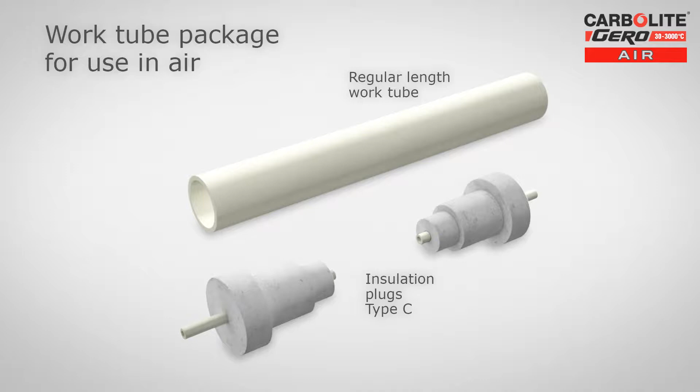Let's start with the simplest, air. To work within air atmosphere, a regular length work tube and Type C insulation plugs are required. These are installed in the tube furnace as shown here. The purpose of the end plugs is to prevent heat losses from the ends of the work tube.

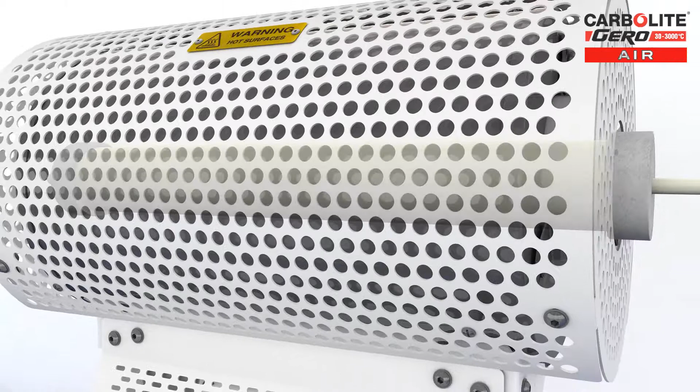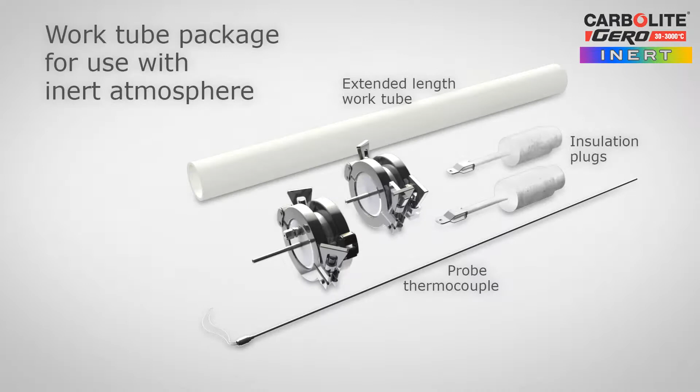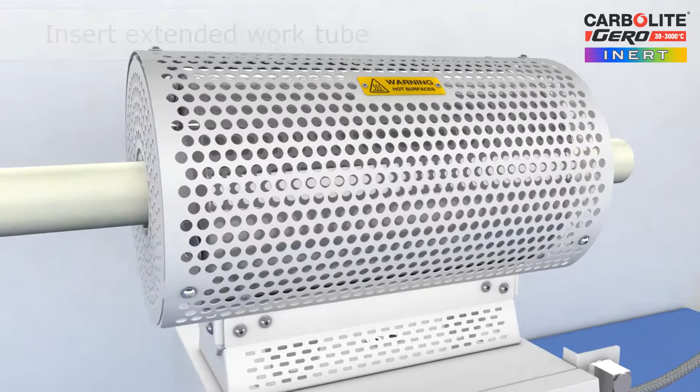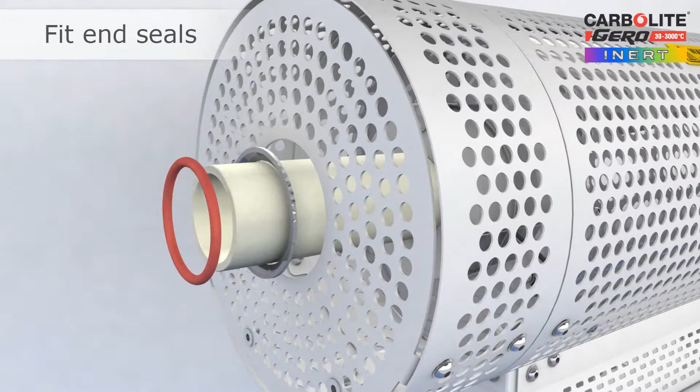For use in inert atmospheres, Carbolite Gero offers a work tube package consisting of an extended work tube, a pair of end seals, a pair of insulation plugs, and a probe thermocouple. Extended work tubes require an additional tube support assembly, which is easily fitted. The first parts of the end seals are attached to the work tube and can permanently remain in place.

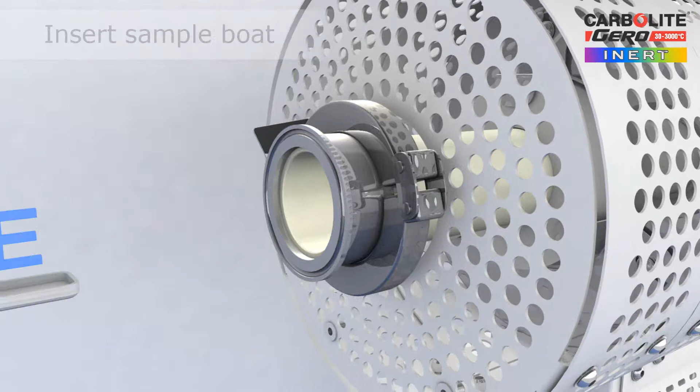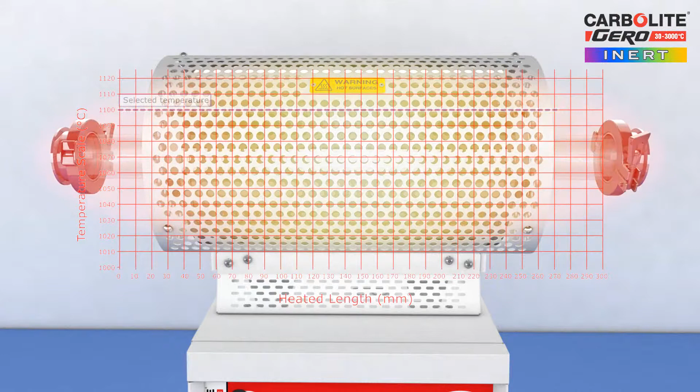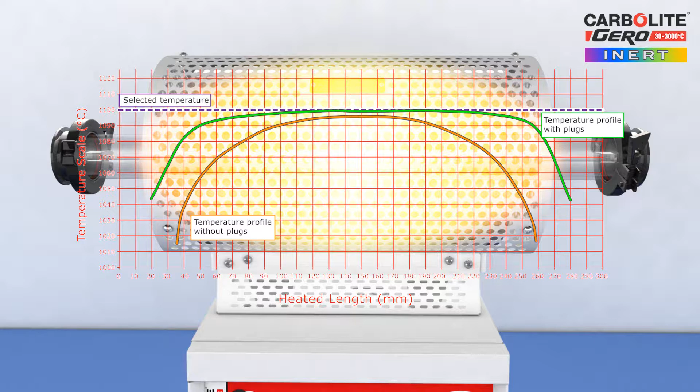The sample to be heat treated is inserted into the work tube, followed by the insulation plugs. The end plugs consist of thermally efficient insulation materials and are required for 3 reasons. 1. To prevent heat loss. 2. To improve the temperature uniformity inside the work tube. And 3. To protect the end seals from very high temperatures inside the work tube.

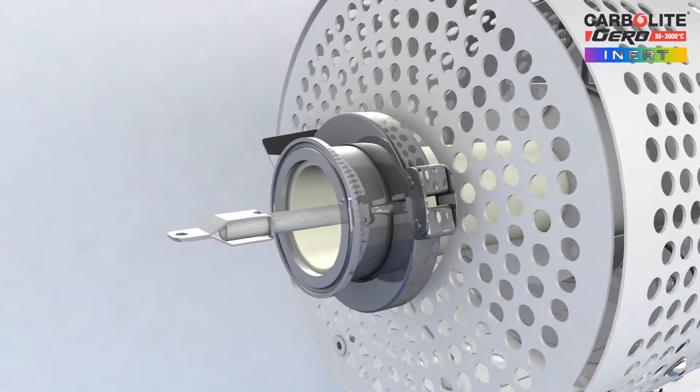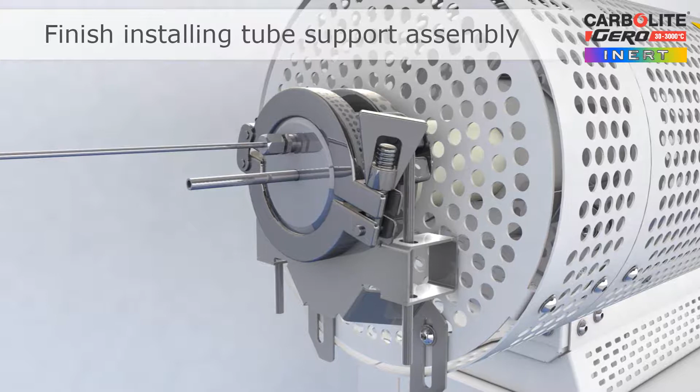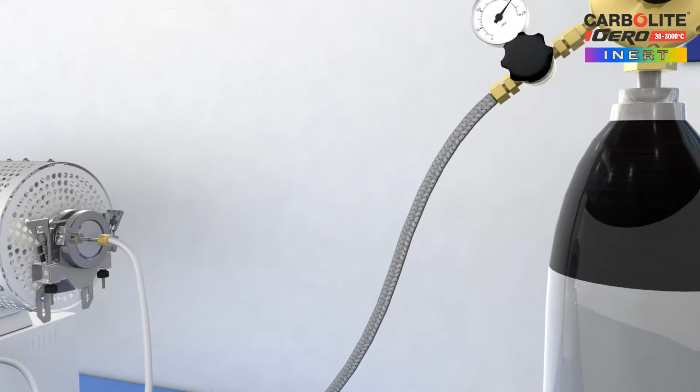The end seal plate is fitted and clamped in place to provide a gas-tight assembly. The remainder of the work tube support assembly is fitted. The gas supply can now be connected. The maximum pressure for the gas supply must be regulated to 200 millibars, and a flow meter is used to set the gas flow rate.

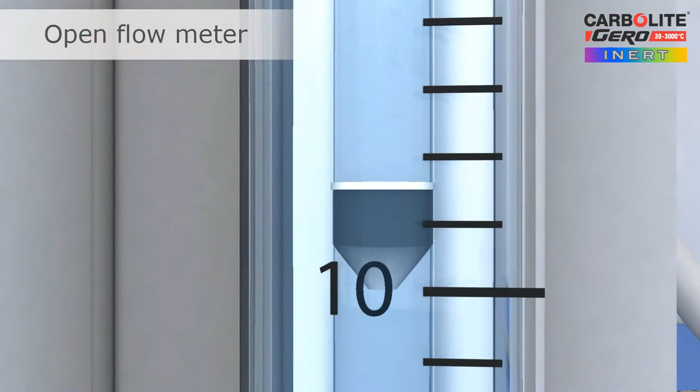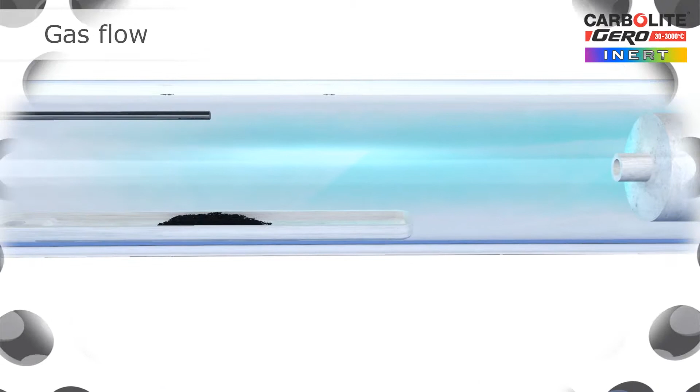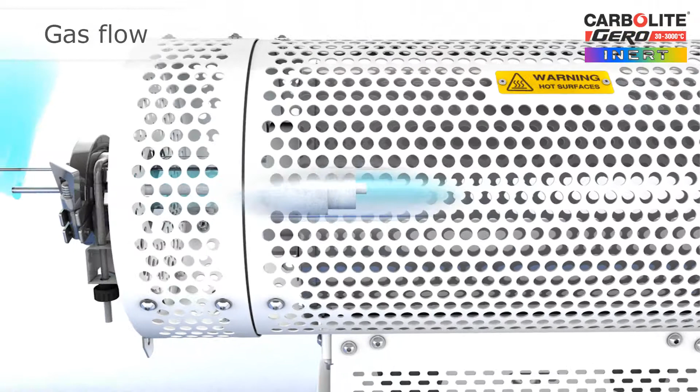The inert gas enters the work tube and displaces the air, and in particular the unwanted oxygen. This purging sequence should take place below the reaction temperature. A combination of flow rate and purge time reduces the oxygen levels to extremely low values, such as 10 parts per million. Depending on the gas being used, a fume extraction hood installed above the furnace may be required, or the outlet could be connected to a pipe to take the exhaust gases to a safe location.

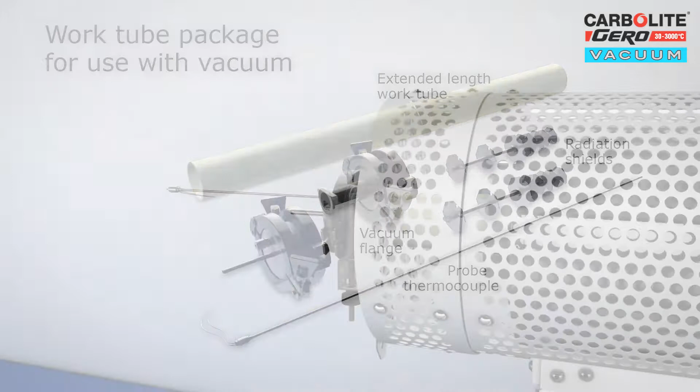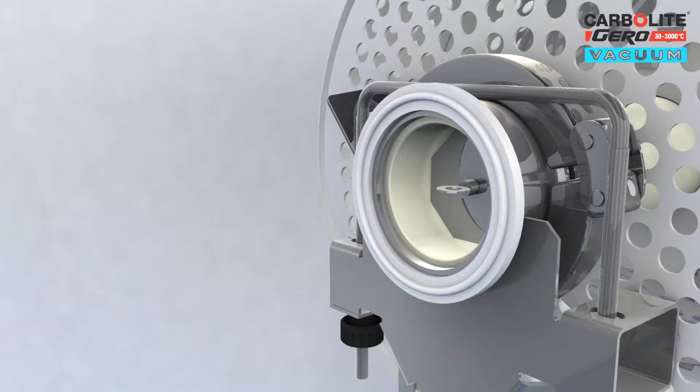For tube furnaces working with vacuum pressure, Carbolite Gero offers a work tube package including radiation shields and end seals with an NW or KF vacuum flange to which a vacuum pump can be attached. In this case, radiation shields are used to maintain temperature uniformity and reduce the heat losses instead of insulation end plugs, which would contain trapped air in the porous insulation materials.

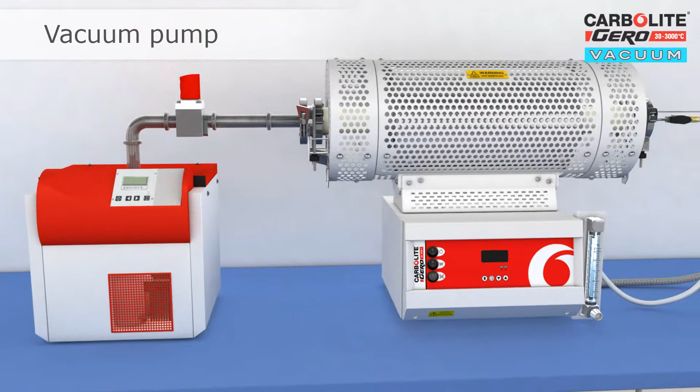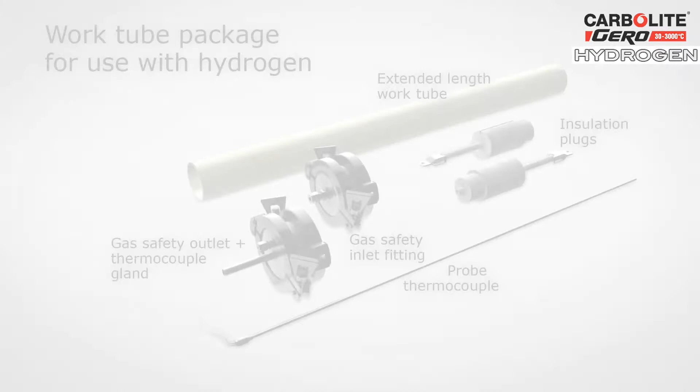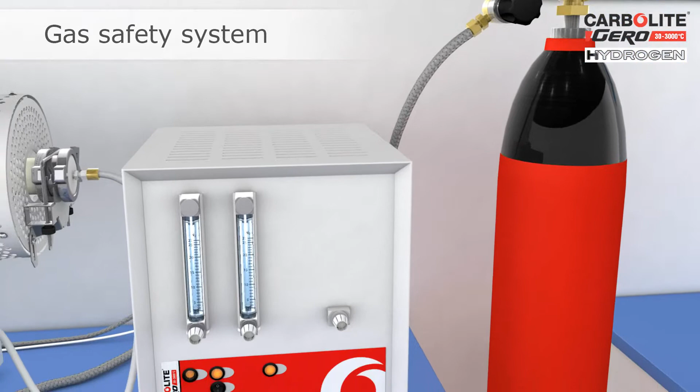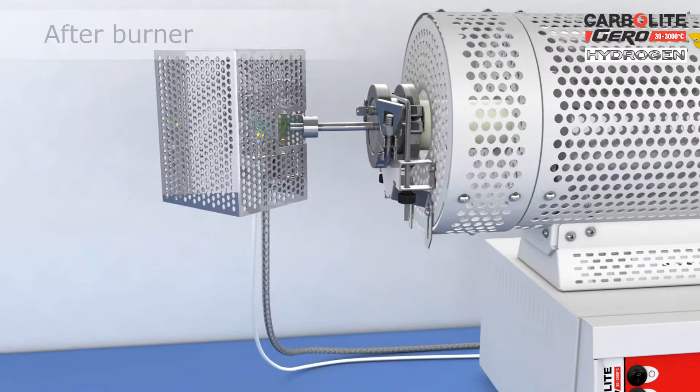For applications involving hydrogen, Carbolite Gero offers an additional gas safety system which can be attached to the tube furnace to safely control the gas flow. The gas safety system ensures nitrogen purge and only allows the hydrogen to flow when the furnace temperature is above its auto-ignition temperature. An afterburner ensures that unburned hydrogen is combusted as it exits the work tube assembly.

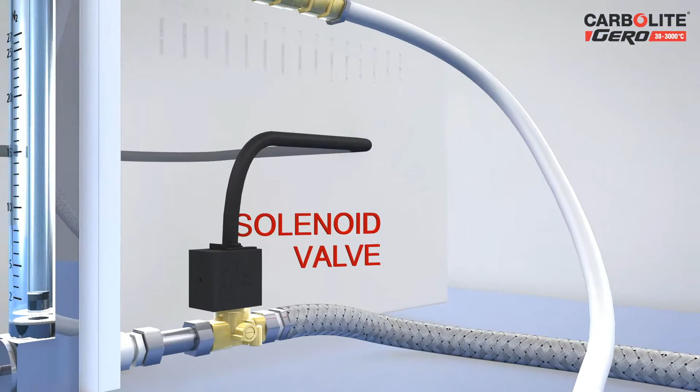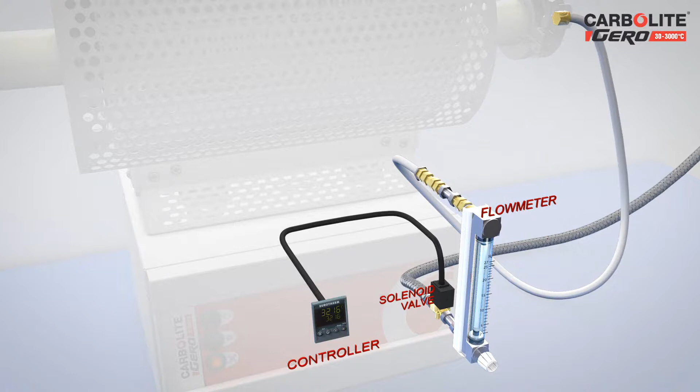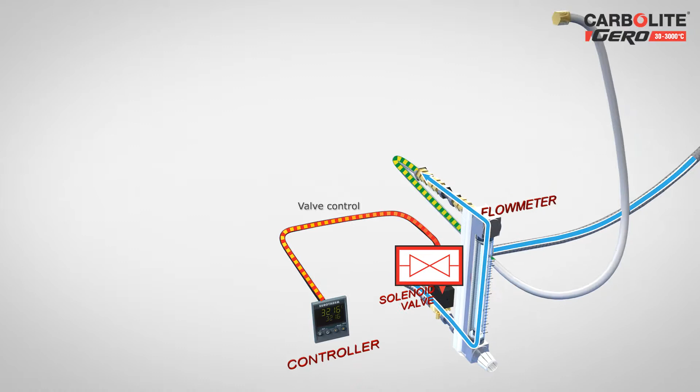In addition to work tube packages, Carbolite Gero offers further components to optimize the use of the furnace. Together with suitable temperature controllers, solenoid valves that control the flow of gas can be fitted. The valves can open or close the gas flow at preset temperatures. In this example, the gas is allowed to flow above a defined temperature. The temperature controller activates the solenoid valve above the defined temperature and closes it below the defined temperature.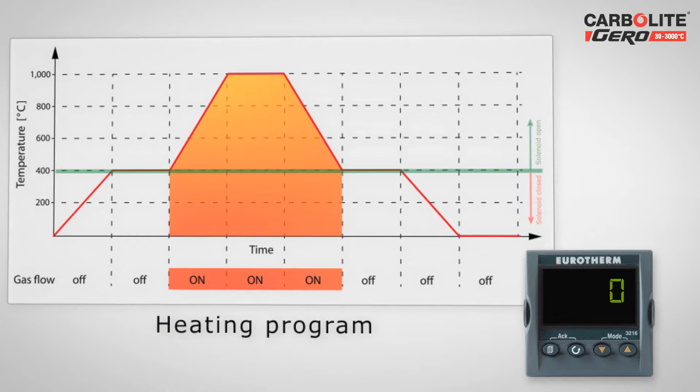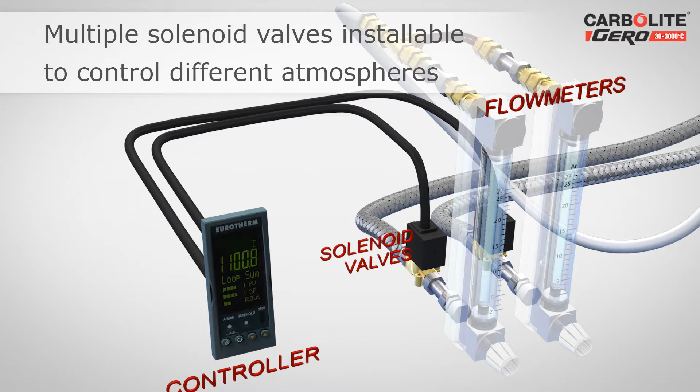It is also possible to fit several solenoid valves and flow meters to regulate the flow of several gases. This makes it possible to realize complex atmosphere process control. In this example, two gases are switched on and off during defined segments of a temperature program.

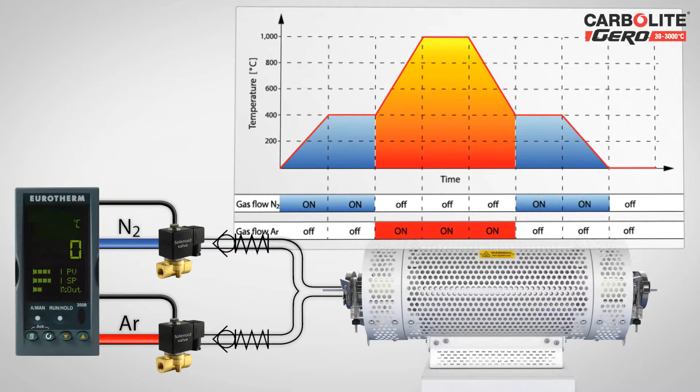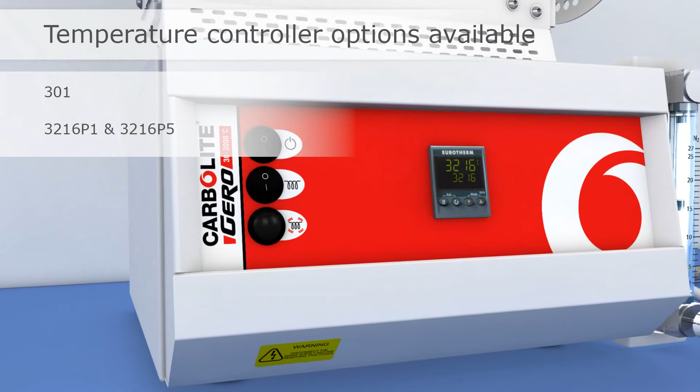Carbolite Gero offers a wide range of high-quality temperature controllers to meet customers' specific requirements that include sophisticated temperature programs with integrated data logging and a range of gas components for various atmosphere control.